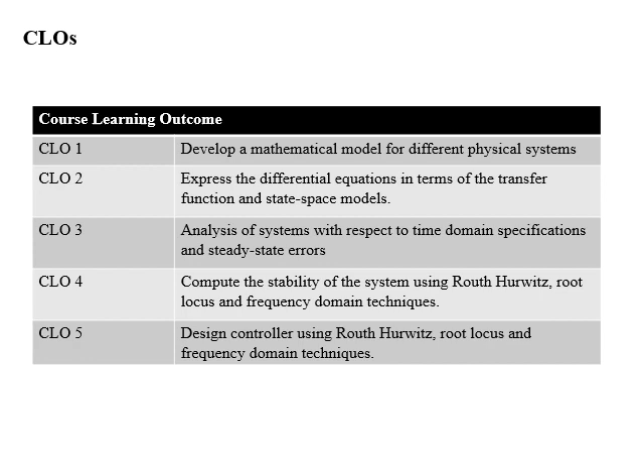Dear students, coming to the book affairs, we'll be using Control System Engineering by Norman S. Nise, 6th edition, as our textbook, and for reference purposes you can use Modern Control Engineering by K. Ogata or any other which sounds suitable to you.

Some familiar terms of this course: your course title is Control System. This is a course of 4 credit hours, in which you will be dealing with 3 credit hours for theory purpose and 1 credit hour for lab. Your course code is EEE 345 and the prerequisite of this course is Signals and Systems.

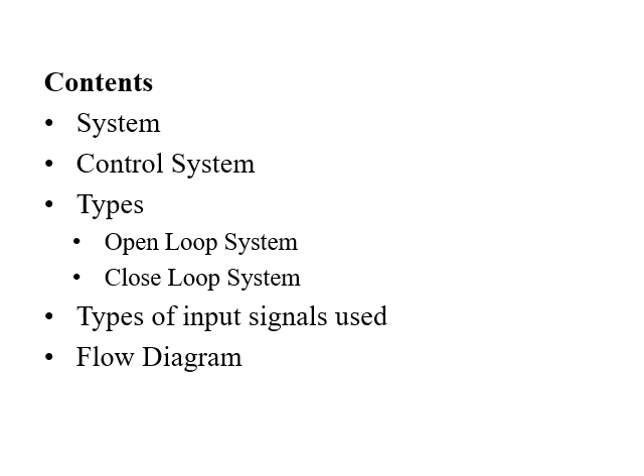Starting with system: any set of components that accept input, process it, and provides output is known as a system. Like any object, any set of components which you give input, on application of input, performs certain operations and provides us output.

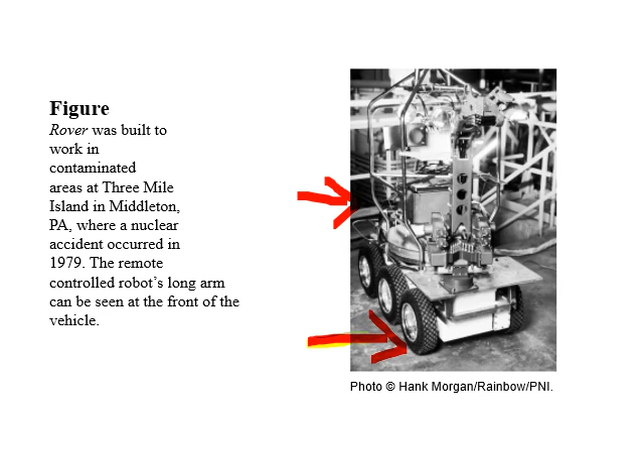Now coming to control system. A control system is simply defined as applying a desired input to a system and obtaining a desired output from it. The desired or required output is applied as a desired input to a system, to which the system responds and its output reaches the desired level.

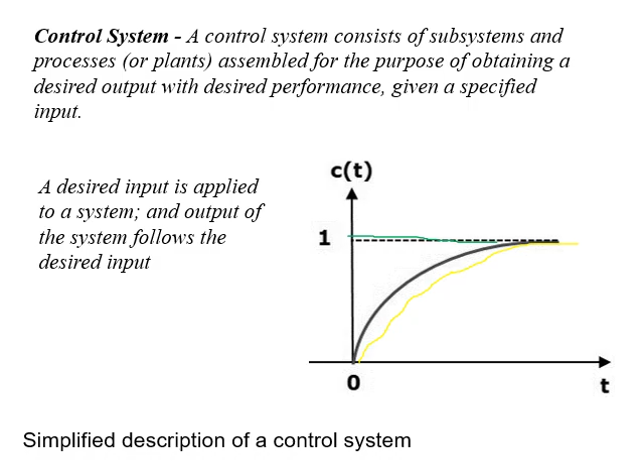Now coming to some basic parts or components which we'll be using throughout the course. First one is plant, second is sensor, and third is controller. Basically these are all systems which accept input, process it, and give us output.

Starting with plant: a plant is a system which we want to be controlled or from which we want a desired output. Second is sensor, which is used to measure the output and monitor whether our system is moving to the desired output or not. Last is controller, which is a basic component that provides the desired signal to the plant for the desired output.

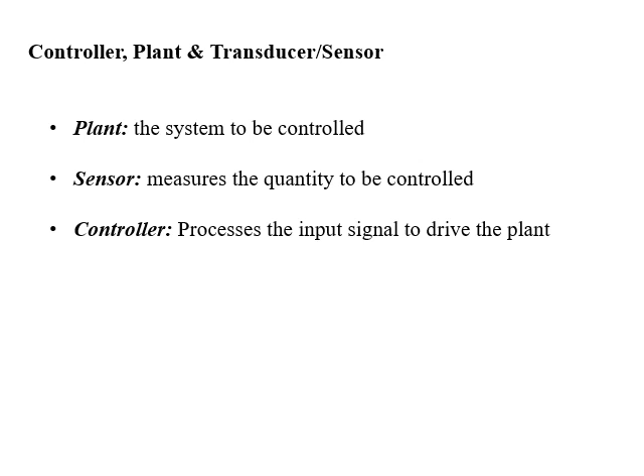Now coming to configuration of control system. A control structure is implemented in two ways: first is open loop system, and second is closed loop system.

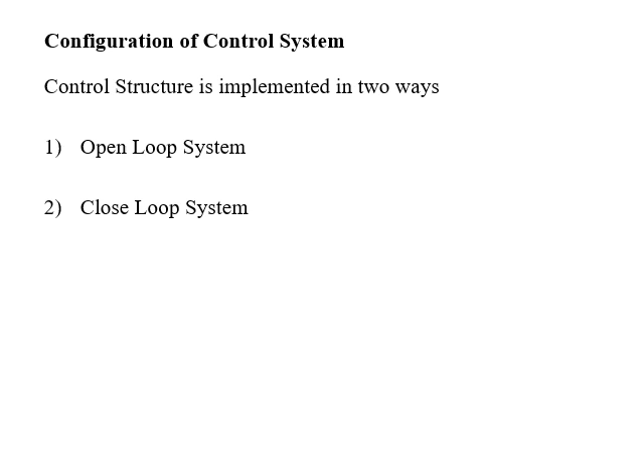Open loop systems are a type of system in which output is not monitored by the system. If you see the diagram, you have input, controller, control signal, process or plant, and output. This means the system has a predefined operation against any input. You apply the input, the controller processes it, generates a control signal, and gives it to the plant, and the plant or process generates the required output. In this type of system, output isn't fed back to the controller or monitored with the help of a sensor, so we are not sure whether our system is following the desired output or not.

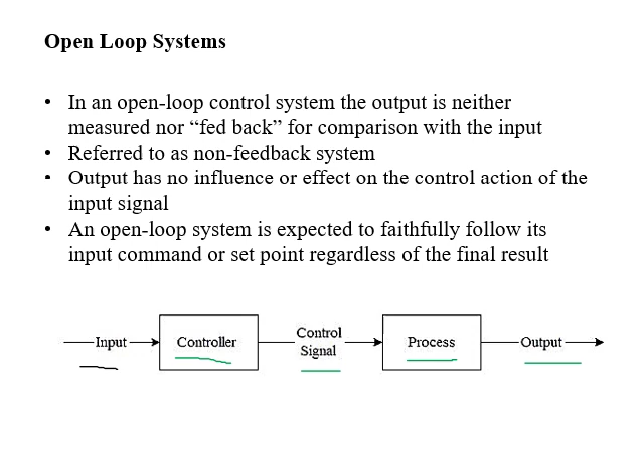Next we have closed loop systems. These are systems in which we monitor the output with the help of sensors or measuring elements. The output is measured with the help of a sensor, transducer, or any measuring element, and fed back to the system.

Before the controller, an error is generated between the desired input and the output of the system, and then according to the error, a control signal is generated by the controller and applied to the process or plant. If this error is increasing, meaning the difference between desired input and system output is also increasing, the closed loop system is not performing as per requirement. And if this error is approaching zero, it means the system output is also approaching the desired output.

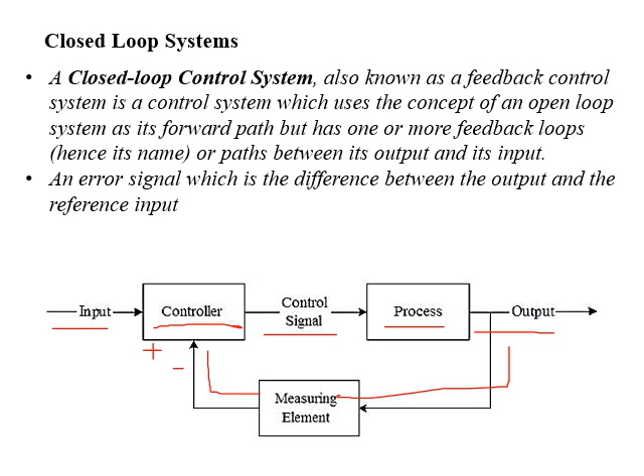Let us look at a few examples of open loop and closed loop systems, starting with a washing machine. For cleaning clothes with detergent and water, we just rotate the knob and wait for clothes to be cleaned. When the time is up, we check the clothes to see whether they are clean or not. This is an example of open loop implementation of checking whether our clothes are clean using a washing machine.

What if we add a few sensors in the washing machine that monitor or measure the level of cleanliness? The machine will keep running until that desired level is achieved. So now it becomes a closed loop system, which ensures that the required level of cleanliness is achieved.

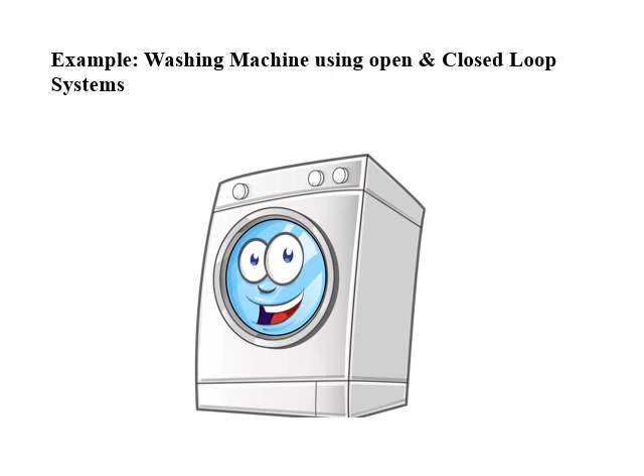Under this topic, the next example we have is of a moving car. Consider a conventional car without cruise control or speed control system. In a conventional car, to maintain the desired speed, we press the accelerator and monitor the speedometer.

Now if we want to move the car at 30 km per hour, as per requirement, we press the accelerator and the car reaches the desired speed. After this, we maintain the same pressure on the accelerator. Now if after a distance of 10 to 15 km the car reaches an uphill road, as the same pressure is maintained, the car's speed will automatically slow down, but it is required to maintain a speed of 30 km per hour. In actual, the car will be moving with a speed lower than 30 km per hour.

And if the car reaches a downhill road with the same pressure on the accelerator, the car will move with a speed greater than 30 km per hour, because we don't have a cruise control system monitoring the speed of the car. Now we have a car with a cruise control system. We set a desired speed of 30 km per hour. Now whether we have a plain road, uphill or downhill, the cruise control will automatically adjust the speed of the car to 30 km per hour. So now this becomes a closed loop system.

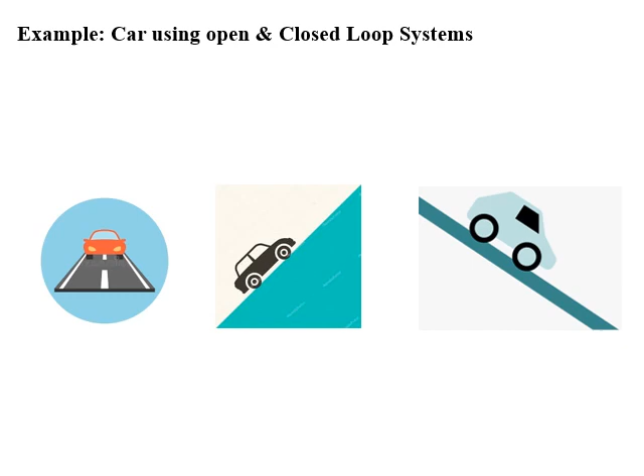Okay, now we'll study the comparison of open loop systems and closed loop systems. As studied earlier, open loop systems don't have a feedback path, while closed loop systems monitor the output of the system, which means open loop systems have predefined operation.

In comparing these two configurations of systems, the first point is stability. As said, open loop systems have predefined operation, so for any specific input, the open loop system will perform the respective operation. For a closed loop system, you have to determine whether your system is stable or not.

In moving a system from open loop to closed loop, there exists a possibility that a stable open loop system may be transformed into an unstable closed loop system. So every time in this conversion we have to determine the stability of the closed loop system. Further about this we will discuss in the chapter on stability.

Now the second point is memory. As we know, in a closed loop, output is determined with the help of sensors or any measuring element and requires comparison. For this, some memory elements may be required to store the information. Whereas in an open loop system, you have input applied to the system and you get output. In a closed loop system, you require comparison, and for this you may require memory elements.

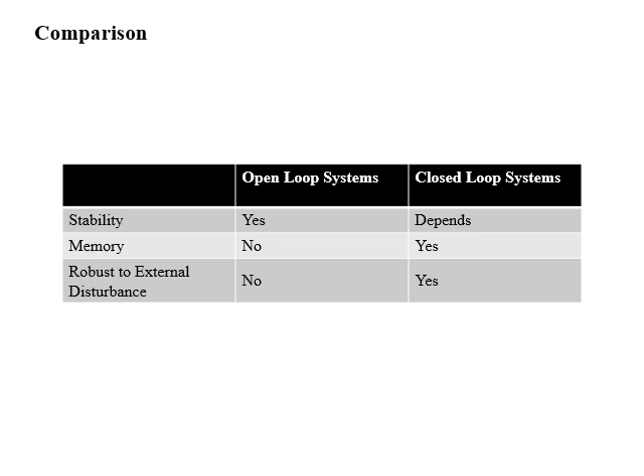Students, now we will study the course flow. In this course, whatever problem is given to you, you will start from mathematical modeling and try to find out the differential equation of the system. Now if we are analyzing our system in the frequency domain, then with the help of the Laplace operator we will find out the transfer function of the system. And if we are studying time domain analysis, then we will find the state space model of the system.

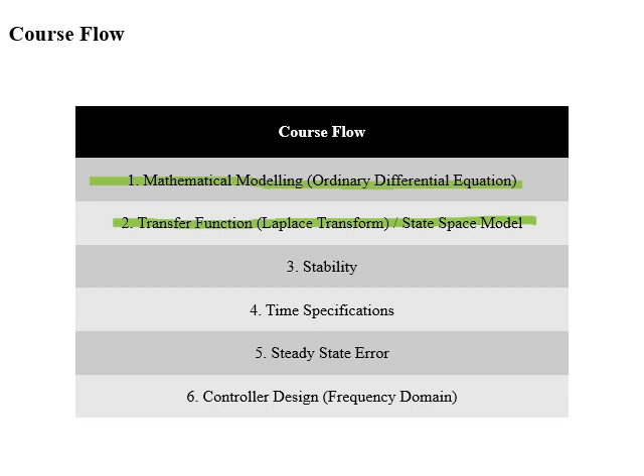After the transfer function or state space model, we will compute the stability of the system and find out whether our system is stable or unstable. If our system is stable, then we will find out time response specifications, which include transient analysis. And after transient analysis, we will study the steady state error specification of this response.

After steps 1 to 5, we will check whether our system fulfills the given set of conditions or not. If the time response specification meets the given set of requirements, then we are done here. And if certain changes are required, then we'll have to design a controller for the system. Also, if our system is unstable, then we have to design a controller for this system.

This is the whole flow of the course: how we will start from mathematical modeling, transfer function, state space, stability, time response, steady state error, and at the end we'll design a controller for the system.

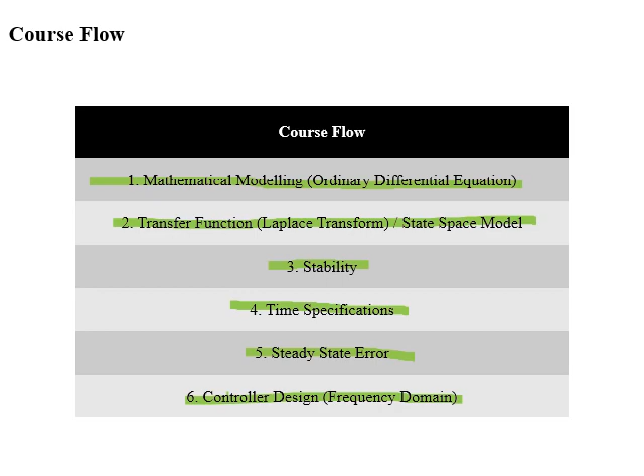Students, now we'll study various test signals which we'll use throughout this course. These signals will be applied to a system and certain time response specifications and steady state error specifications will be checked. Many of you will be quite familiar with these input signals. In the series of input signals, the first one is the impulse signal.